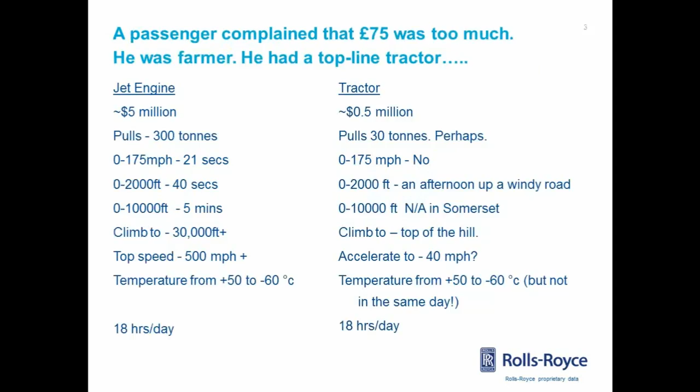Wrong button. Okay, Bill Gates apparently said there's probably no development in the world as complex as the development of a civil jet engine. He didn't say it to me, but I heard that he did say it.

And much of the safety, much of the reliability is in the software, is in making sure that all of the hardware is operating within the limits of what it can manage. It doesn't get too hot, it doesn't spin too fast. Where you've got a couple of signals, you're selecting the right one. Where you've got electrical failures, you're ignoring them, you're coping with them, you're managing them.

So the overall complexity of a gas turbine control system is large. And safety is the #1 priority. And that isn't just a slogan. We could make them cheap, but occasionally they drop out of the sky. You know, they're not like mobile phones. You're not going to say, yeah, fair enough, but it was good value. You're not going to fly. You're certainly not going to fly with Rolls-Royce engines.

So we have to make sure they're safe. They continue to work all the time. We can't have a blue screen of death on an engine. Pilot says we'll be rebooting, we'll be landing in 5 minutes. So we have to test the software. And how does testing help us achieve this? Pretty stupid question, really, isn't it?

We have to have total control of what's going on in the computer and in the engine. We have to have control of the software design, the implementation, and we have to have total control of the testing. It can't be an afterthought. We can't produce the software, get the engine running on the test beds and sort of say, yeah, we're pretty much ready to stick it on an aircraft now. Now we'll just have a go at testing it and make sure it's really okay. We have to test it from the beginning, and it has to be thorough.

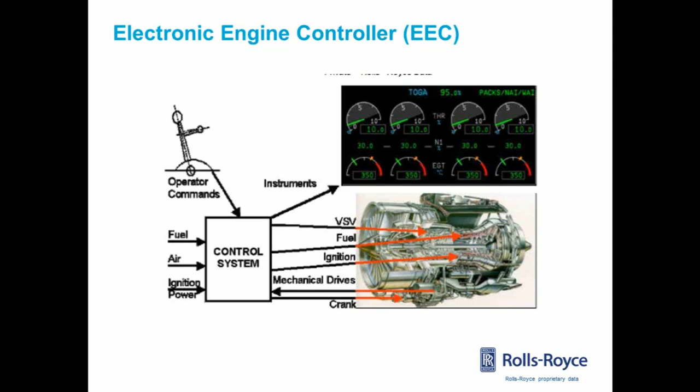We look after fuel flows, we look after temperatures, we look after the oil system, we look after vibration, we've got electrical generation on here, pumps. You can see the complexity starts to build up. On any one of those, we have to be able to manage electrical faults, short circuits, open circuits, dual sensors, comparing the sensors, which one's right, which one's wrong, which set of control laws are we running on, which sensors do we need for those control laws. So it starts to build up.

From our airframer, we'll get a set of requirements. This is what we want from you. There's lots of mechanical requirements in that, but from the software world, they will tend to be control laws, behaviours, interface specs: how do we talk to the cockpit, what sort of data do we want to send, how do they want to start the engines, how do they want to run it, what sequences of switches are coming through. But a lot of it they leave to us. We run the engine, we just provide the thrust and push it along.

That comes down. We will then have engine requirements. What do we need to do with the engine? What are these limits, these temperatures? What is a starting sequence? What's an acceptable level of vibration? Does it change? One of the things that we're doing with health monitoring now is looking at the vibration.

We measure speeds with a toothed wheel and a magnetic probe. If you have a missing tooth, you take one out deliberately, you can tell where you are in each rotation. And if you can correlate the vibration with the position to get a phase, you can work out whether the engine is out of balance, and if it's out of balance, where it's out of balance, and then they can put balancing weights on because of the calculations you can do.

So you can say, actually, this engine with a little bit of degradation has just gone slightly out of balance, and put a small weight there and it'll be back in balance. So we can do that sort of useful information. They come down as engine requirements. They'll flow down to EEC, the engine controller requirements, which will then split into hardware.

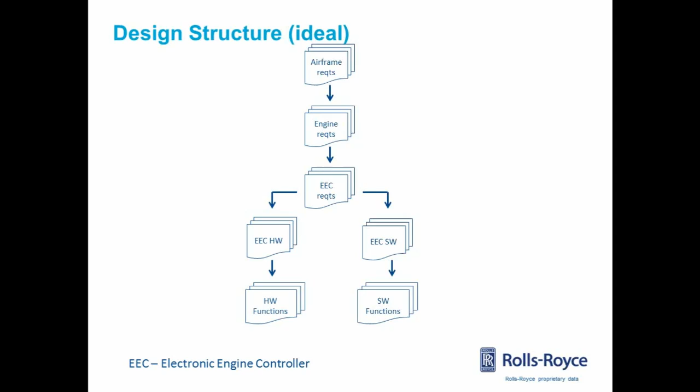We've got the order of 600 cables going into an EEC. They're not 600 signals. Some signals are maybe 5 wires, some 4, 3, 2, but a lot of signals, a lot of possibility for wiring and data problems, and then down to software functions. And it's lovely. It's a nice, easy set of structured requirements. Of course it isn't. That's what it really looks like.

And worse, you've got airframe requirements on the software. They want to make you do certain things. They want direct bus communications. They don't pass the bus through the engine. They go directly to the software. You've got regulatory requirements. How do you have to do stuff? How do you have to prove it? How do you have to test it?

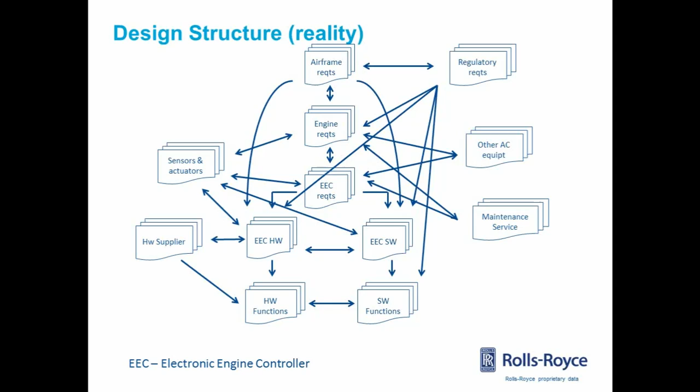We've got maintenance requirements. How are we going to be able to look after this in the future? What sort of data do the ground crew want when things happen? The hardware supplier is going to come back and say, can't do that. We want you to put something in the software to manage it instead because that's too tricky. All the sensors and actuators, they want the software to behave in a different way. So it gets quite complicated. And at the end of that, we've got to test it. So that's where we are.

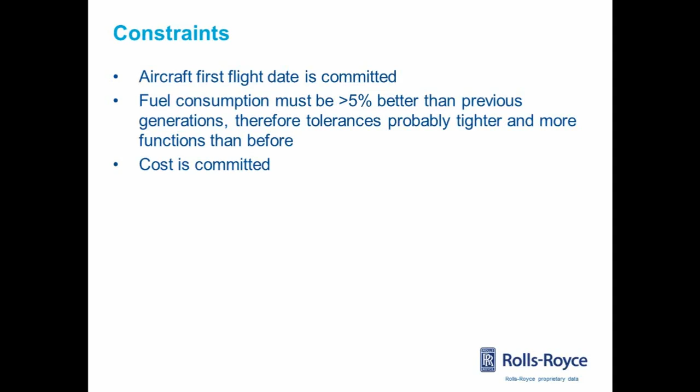You've been given this project, large number of signals. First flight date is committed. The engine fuel consumption must be superb, so we're going to have to operate in tighter tolerances than ever before, and the overall cost is fairly well committed. So we can't really afford to go around the testing loop a lot of times. We've made sure the program is well planned. We've got enough money to do it, but only do it once, 1.5 times.

So, in the purest sense, software testing is sort of up to here, up to when you put it on the target. To Rolls-Royce and to the airframe manufacturer, the software testing is delivering a box that works. So they're not really thinking about just the software. We can't turn around and say, well, the software was fine, there's some sort of stack overflow, and that was a hardware problem, really. They don't really care about that. The engine stopped, did the wrong thing.

So hardware testing is effectively an important part of software testing. Can we run it on the hardware? Does it behave correctly? Do the electronics in the hardware feed the right signals into the software? This sort of counts as software testing in many ways because the two are so closely coupled. We would then go on to system testing. If we put a box like that in a representative environment with simulators, does the software functionally do what's needed?

Maybe it's a super bit of software, it may never crash, it may have not used much memory at all, and be beautifully architected, but if it doesn't do what's needed, if it doesn't control the speeds accurately, if you haven't got the right information coming out, if it doesn't generate the right messages, it's fairly useless. We'll then go on to engine testing. Testing on a rig's lovely, but guess who specified these rigs? Well, the control system team did. And guess what assumptions they based it on?

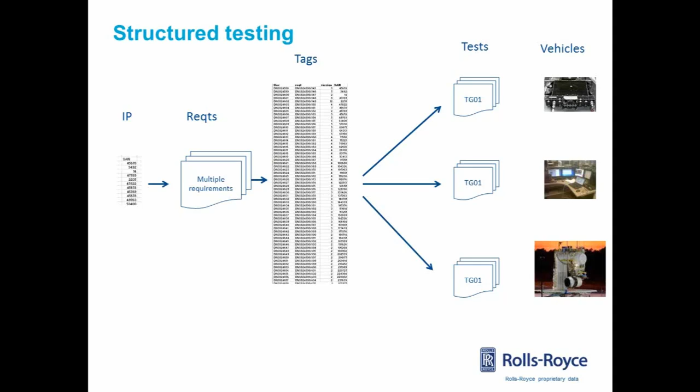So an example: when a temperature exceeds a limit, generate a message in the cockpit. That's a nice system requirement. We get our hardware that our supplier has validated will do this. It will take those inputs, those millivolt inputs, analog to digital, and will provide us a signal. So we've got their test results. That's part of our result, our test case. That'll go in through our OS.

Our OS will look at it and say, this sort of A to D signal that we've got, is that a reasonable number? Does it say it's 8 trillion degrees? If so, probably the sensor's failed. It's producing millivolts, but it's rubbish. So it'll validate the signals coming from the hardware. It'll pass it to the application software.

The application software will say, all right, we know the temperature's between 0 and 100. That's great. What should it be? The engine's running like this. It shouldn't be above 60. Bit of a problem. Fault handling. Temperature's above 60, but we know it's genuine. Therefore, something's gone wrong with the engine. Pass a sort of a fault off, saying there's something gone wrong with the engine.

Alternatively, one sensor says 80 and one says 30. Now what are we going to do? We've got two sensors supposedly measuring the same thing. So we have to have fault accommodation logic. We would generally take the worst case. If they're in range and one of them's high, that's generally the one we would go with, assume the worst.

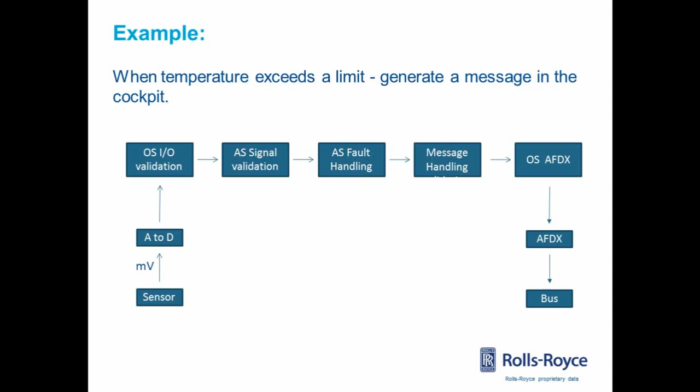So splitting it down quickly and going through the stages, because I'm beginning to run out of time. We've got our hardware. We know that the software runs consistently on the hardware. That's very important. The box must never crash. The hardware itself must run consistently. When it's hot, when it's suffering vibration, when there's EMC, when we've got internal faults, the box must be able to detect them, flag them, isolate them. So we know what's going on is consistent.

We then do software code level testing. We will do formal methods, the sort of thing Jim was talking about earlier on just before lunch. We need to know that all of the code is executed, there's no dead code, all the decisions can be exercised, that there are no divide by zero type errors, overrun errors, the software itself is not going to crash. And then functionally, each of those units does what's required.

So we will have a unit spec, we'll have a load of test cases, what data should go in, what results should come out. They're generally simple things. The functions are generally divided down so that each one is as simple as possible. This is a simple range check on a number, or it's a select highest wins type of little block of software. We can then integrate those together into the software and with the operating system.

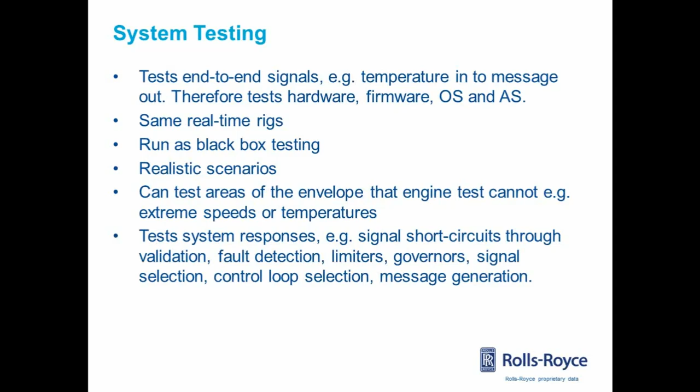They're trying new turbines, valves, sensors, all sorts of things. And quite possibly passing off production engines. So we may get a fairly limited slot and we've got to use it effectively. We'll then go to flight test. Again, fairly limited. The airframer has got their aircraft, they know what they want to do with it. And we get to do some stuff on there.

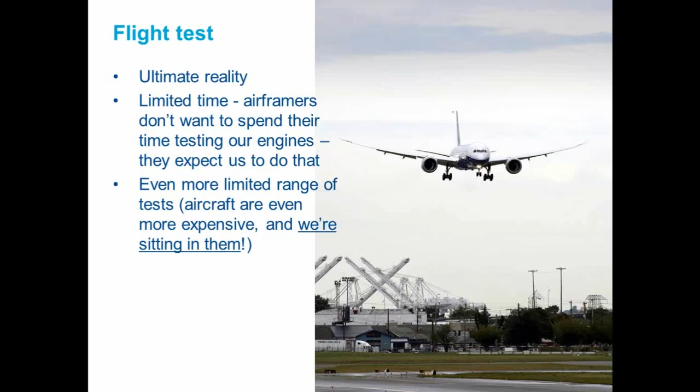We have to prove stuff to the airframer, and for certification, very often, I mean, I was on the A340, we're sitting in them, in which case we're doing really limited tests, okay? Keep it nice and simple. It's all been done on the engine, I'm fine. And then we have to gather all those results, and we have to collate them. And we have to produce result reports.

Now obviously, whenever we've come across a failed test, we'll have been feeding that back as early as possible to get stuff fixed. But we typically have 3,500 to 5,000 requirements altogether, and they're going across a range of tests, so we could end up with multiple thousands of results easily. And they have to be all pulled together.

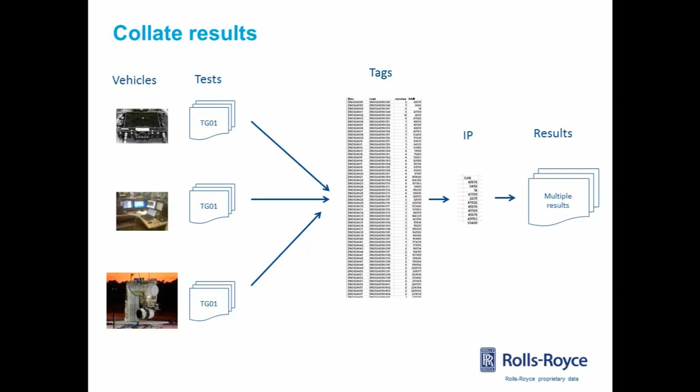And the difficulty with some of this is some of these requirements will have many, many tests, and some of them will only have one or two. So if you've got 99 passes, is that everything? Or was there another test somewhere else that hasn't run yet, but you got another result? So we've got multiple vehicles, multiple levels of requirement. From the airframer, we have to validate we're meeting those.

The engine requirements, we've got to validate we're meeting those, all the way down through to feed into the software requirements. Each of those software requirements will represent a whole range of higher level requirements. Some of them will get tested at many levels. They can be tested all over the place.

And then we need to certify the engine independently of the airframe. We actually demonstrate that engine is capable of flying before it ever gets flying, and the flight test requirements, those tests are either sort of taken on trust and closed out later, or independent of what we're doing to certify the engine. So, that was a bit of a whistle-stop tour. I probably haven't introduced anything amazingly surprising to you there.

Our intelligence is not in the nature of the test. Each of those tests is generally fairly simple, but the whole program is complex. So where we have to put the intelligence is in managing it and making sure that all the software is tested and all the functionality is tested at the right vehicle at the right time. And we can't have teams of millions, and we can't have 8 spare engines sitting out the back, and we have to do it on time.